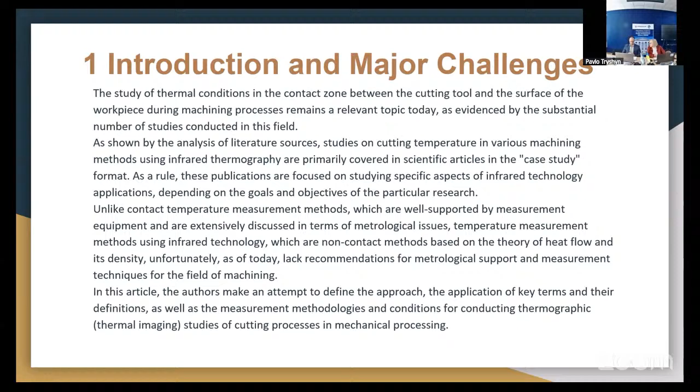In this article, the authors make an attempt to define the approach, the application of key terms and their definitions, as well as measurement methodologies and conditions for conducting thermographic studies of cutting processes in mechanical processing.

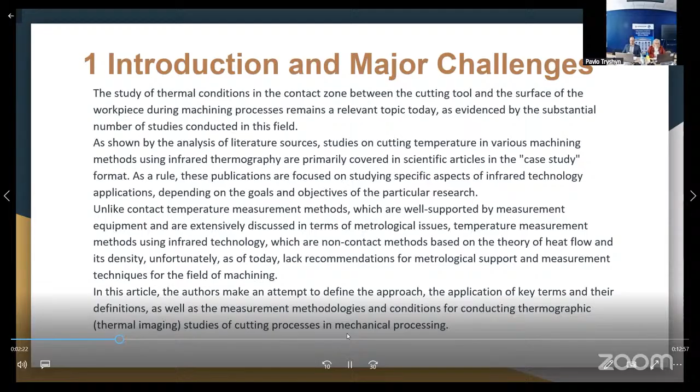Aim and research tasks. The aim of the thematic study is to investigate the specific aspects of conducting thermographic analysis of the turning processes, to define the sequential stages of the measurement method, and to establish the conditions necessary for their implementation, to ensure the acquisition of reliable experimental data.

Research tasks: define the approach, the application of key terms and their definitions, as well as the measurement methodologies and conditions for conducting thermographic studies of cutting processes in mechanical processing.

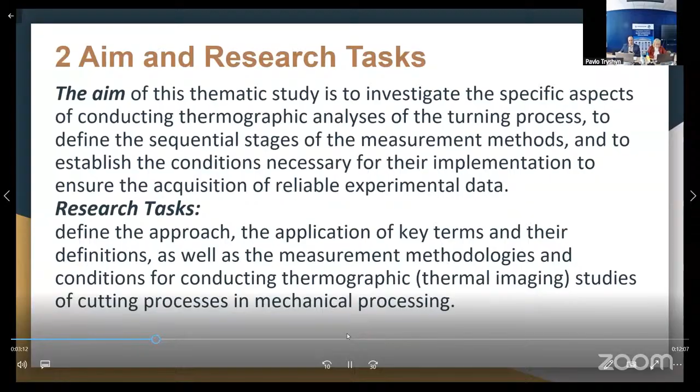Research methodology. Thermographic investigation of cutting processes in mechanical processing should be understood as a research method that displays the temperature distribution in the contact zone between the cutting tool and the workpiece being processed.

In this work, an infrared camera was used as the measuring instrument for conducting thermographic studies. It detects infrared radiation and creates a thermal image based on the radiative temperature of the surfaces of the workpiece and the cutting tool. It is known that radiation is a function of the object's surface temperature, which allows the camera to calculate and display the corresponding temperature.

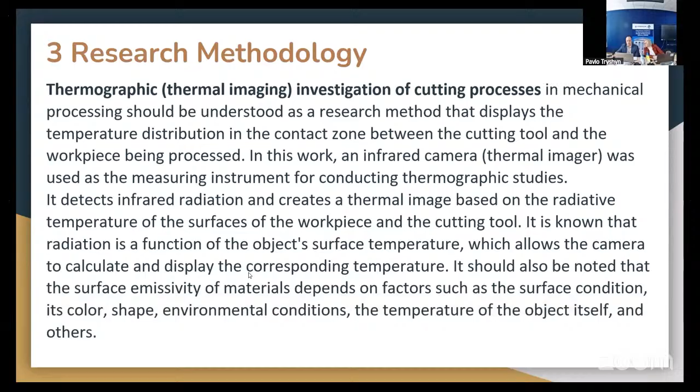It should also be noted that the surface emissivity of materials depends on factors such as the surface condition, its color, shape, environmental condition, the temperature of the object itself, and others. Therefore, for thermographic studies, it is essential to first determine the requirements for the conditions under which they will be conducted.

Metrological and technical characteristics of the thermal imager, environmental conditions, distance to the object of study and observation angle, characteristics of the workpiece and cutting materials and their emissivity, and parameters of the cutting conditions in the machining operation.

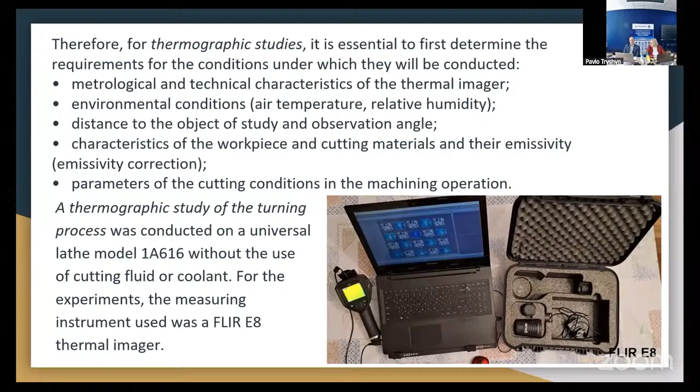A thermographic study of the turning process was conducted on a universal lathe, model 1A616, without the use of cutting fluid or coolant. For the experiments, the measuring instrument used was a FLIR E8 thermal imager.

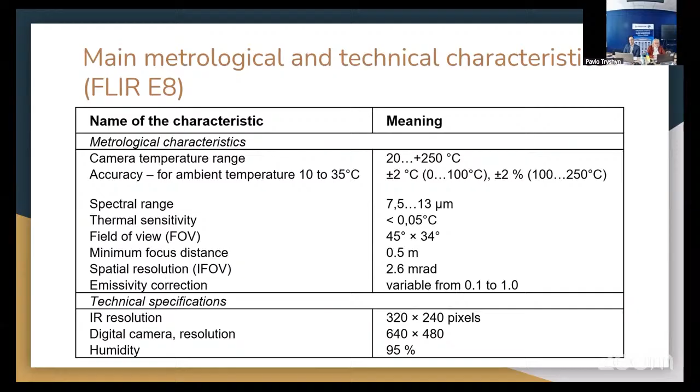This slide shows the main metrological and technical characteristics of the thermal imager FLIR E8, and a schema of the thermal imager setup relative to the measurement object. The minimum possible distance from the surfaces of the thermal control zone when using this thermal imager model is half a meter.

Considering that various materials would be processed during the experiments, resulting in different types of chips, and to avoid damaging the camera's lens, the distance to the object of study was chosen to be the minimum possible, 80 centimeters. The observation angle should be in the range of 45 to 60 degrees.

The setup scheme of the thermal imager relative to the measurement object is shown in Figure A. The infrared camera was mounted on a tripod holder, Figure B, in such a way as to cover the control zone, taking into account the necessary camera field of view parameters.

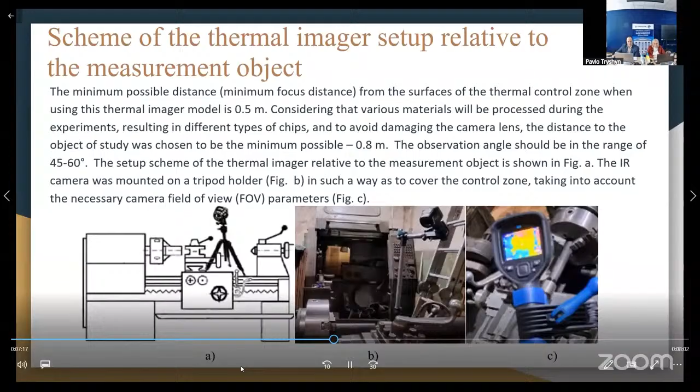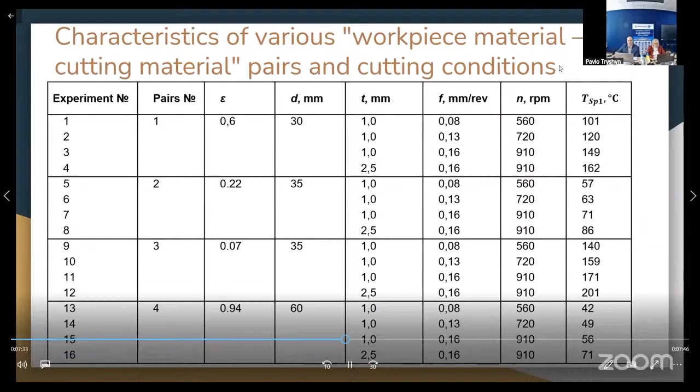Result and discussion. During the experimental research stage, it was necessary to take into account and compensate for the effects from several different radiation sources in order to obtain more accurate measurement results. This infrared camera features automatic real-time compensation, but before that predetermined values were input into its built-in software: the emissivity coefficient of the object under study, the visible reflected temperature, the distance between the object and the camera, relative humidity and ambient air temperature. This software is metrologically significant and is stored in the camera's memory device.

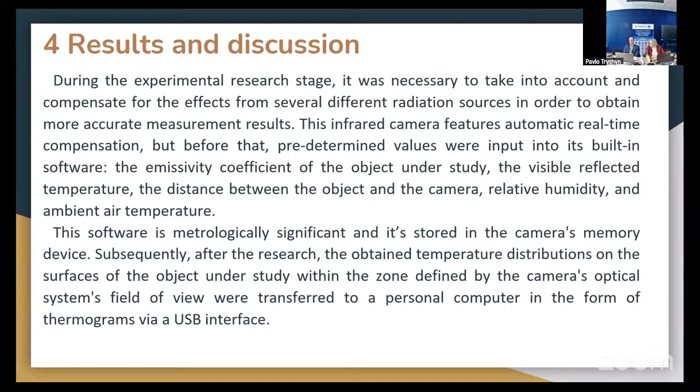Subsequently, after the research, the obtained temperature distribution on the surfaces of the object under study within the zone defined by the camera's optical system's field of view were transferred to a personal computer in the form of thermograms via a USB interface. Results of the experiments.

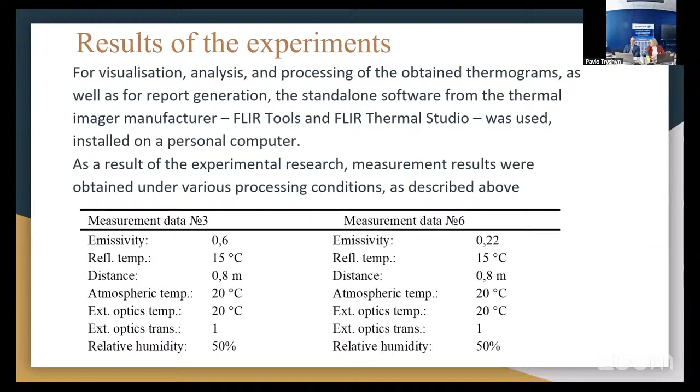Results of the experiments. The analysis of the thermograms was carried out using the FLIR Tools software by moving the spot meter to the desired area in the digital image of the object under study. It is possible to determine the temperature of the cutting insert, the workpiece, and the chips.

In the thermograms, the temperature at the contact point between the tip of the cutting insert and the workpiece is marked as spot 1. The surface temperature of the workpiece is marked as spot 2, and the temperature of the tool's rake face is marked as spot 3. The temperatures on the chip are marked as spot 4 and spot 5.

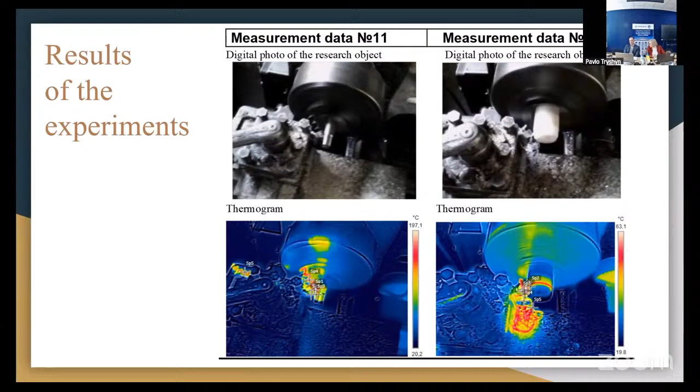Analysis of the presented thermograms. The temperature measurement results are provided in table corresponding to each experimental number listed in tables 3 and 4. To verify the accuracy of the temperatures obtained using the thermal imager in the contact zone of the cutting insert tip with the workpiece, temperature spot 1, a comparative analysis was conducted with the results obtained through the cutting temperature measurements using the natural thermocouple method, temperature T, during the machining of steels grades C22 and X12 chrome, nickel, titanium.

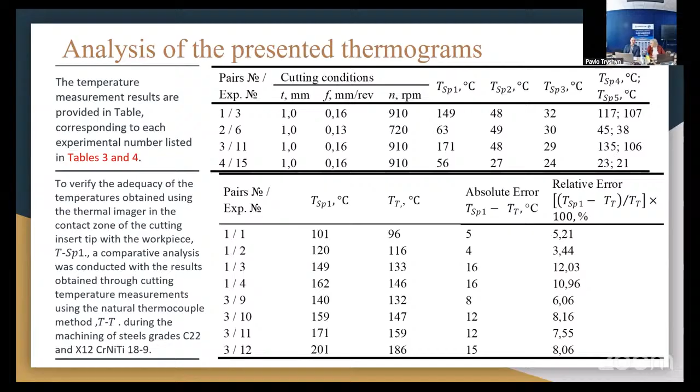Conclusions. Studies have demonstrated the utilisation of the thermographic inspection method for analyzing temperature in the cutting zone during machining processes is an effective approach. It enables research and measurements to be conducted without altering the design of the tool or the workpiece. Moreover, the method contributes to the rapid and efficient acquisition of substantial data through the analysis of thermal imaging. For example, the measurement data T-spot 1 to T-spot 5 obtained from the thermograms can be utilized to evaluate the temperature distribution across the surfaces of the tool, the workpiece, and the chip.

The cutting temperature measurement results obtained through the use of the thermal imager were compared with those derived from measurements taken using the natural thermocouple method. The obtained results of the relative error calculation fall within acceptable limits, which confirms the accuracy of the measurement data.

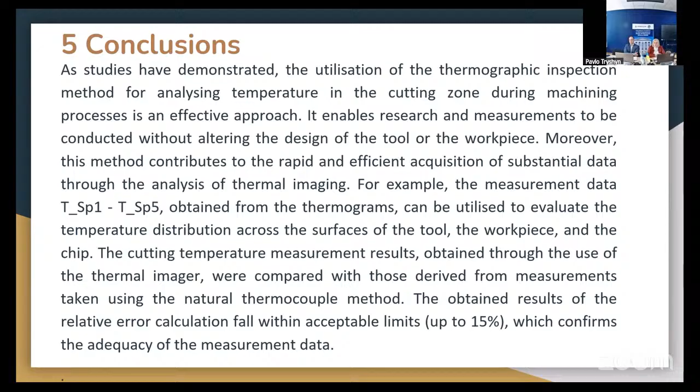For conducting a more detailed analysis of the obtained thermograms, it is advisable to utilize various functions of the toolbar in the FLIR tools software. The study emphasizes the importance of considering metrological characteristics when conducting research using infrared thermography. It should be noted that the chosen observation angle of 55 degrees plus minus 5 degrees, within the recommended range, increases the actual dimensions of the parameters of the field of view.

That means the camera effectively covered a larger area of the cutting zone, as evident from the provided thermograms. At the same time, the accuracy of the camera's focus on the object of study allowed for the clarity of the obtained images. In this regard, it is important for future researchers to correctly set the value of the observation angle when determining the field of view in order to cover the necessary and sufficient area of the cutting zone.

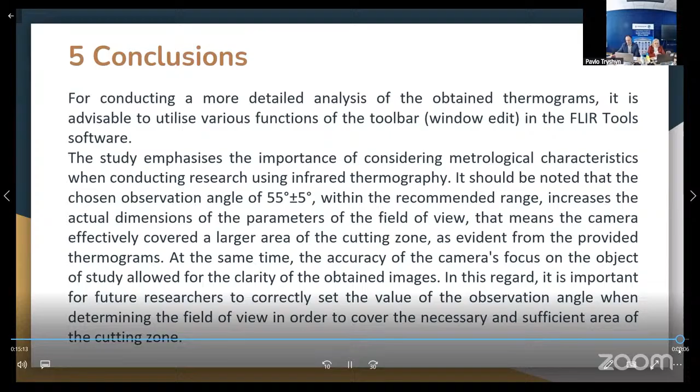Thanks for your attention.

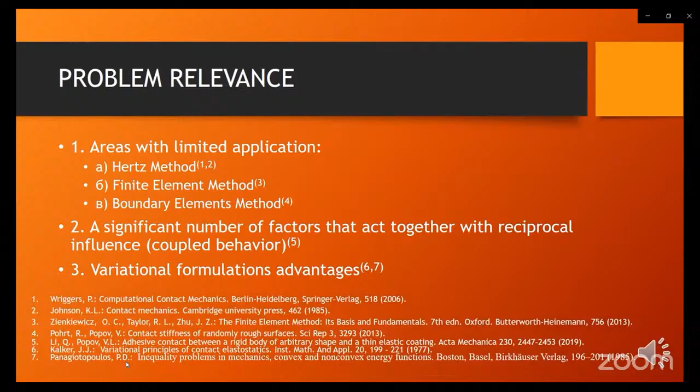This work is devoted to solving the problem using mock-up samples as an example of complex profiled body contact interaction modeling. A new approach is proposed that combines variational formulation, finite element modeling, boundary element methods, and experimental studies, providing an opportunity to substantiate the parameters of verified models. ANSYS Mechanical was used for finite element analysis during the research, but other FEA software can be used as well. For boundary element methods and variational formulation implementation, tools of our own development were used.

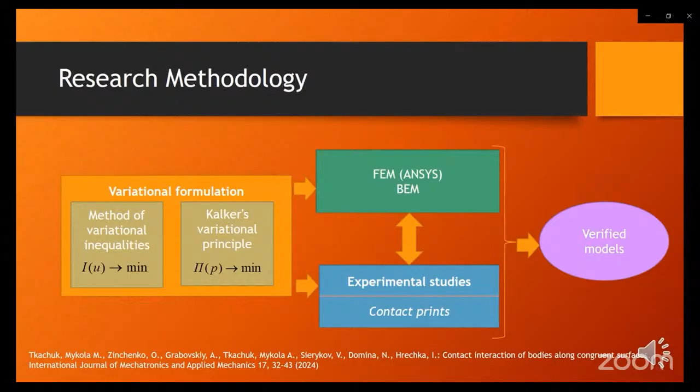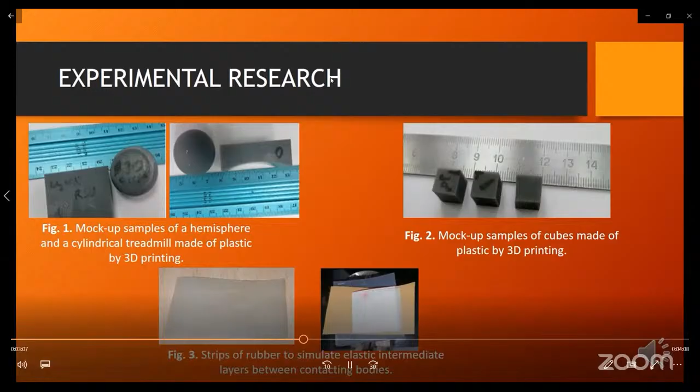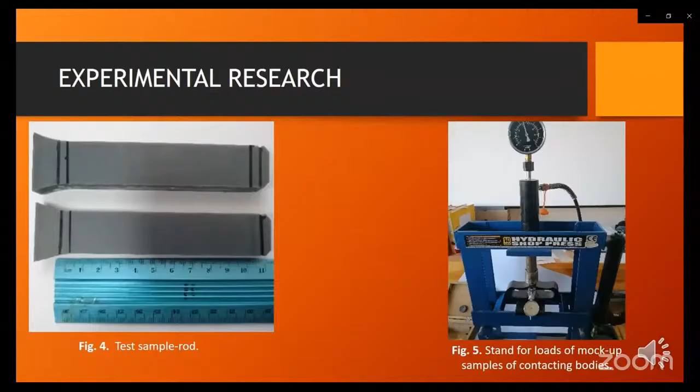For experimental studies, we used 3D printed parts as experimental samples and contact pressure sensitive films to register contact pressure distribution patterns. Parts were printed using SLA technology with 100% infill. Contact pressure was indicated using Fujifilm Prescale film. For measurement, the contacting elements are placed on a rigid steel stand and loaded with a hydraulic press. Mechanical properties of the 3D printed sample material were obtained based on cantilever beam deflections.

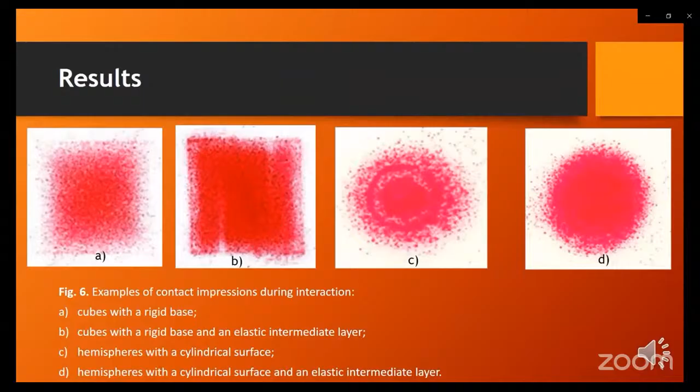These slides in Figure 6 show four different examples of contact impressions. The first two are for cubes with a rigid base. The next two are for the interaction of hemispheres with a cylindrical surface. Similar to cubes and hemispheres, the last pair had an additional intermediate elastic layer. The next two slides, Figures 7 and 8, show the geometry and finite element models built for analysis of the studied body contact interaction. In particular, Figure 7 shows an example of contact pressure distribution during the interaction of cubes with a rigid base.

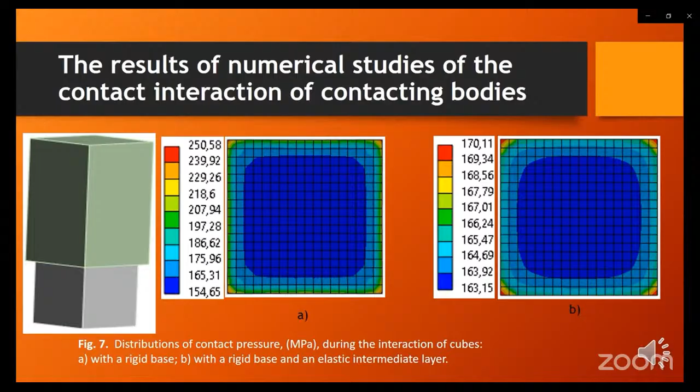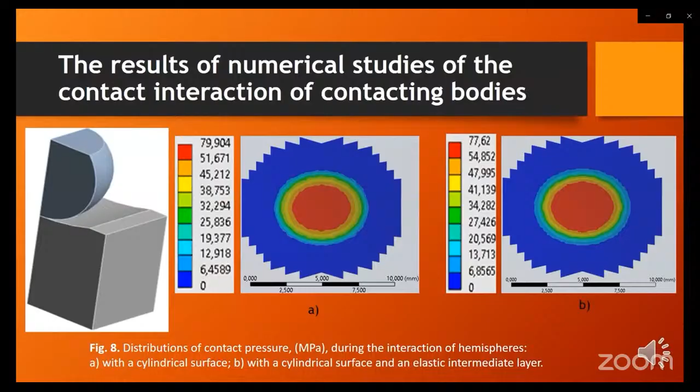On the right side with an elastic intermediate layer, and on the left without. Figure 8 shows a similar example of contact pressure distribution, but for another contact pair type. The slides show interaction of a hemisphere with a cylindrical surface, the right one with an additional intermediate elastic layer.

In this work, an experimental study of the contact interaction of bodies was carried out. Two systems were considered: in the form of a cube and a base, and a sphere and a cylinder. In parallel with the physical experiment, a number of numerical studies of the same contact interaction were carried out. The results of numerical and experimental studies were compared.

Complete and qualitative correspondence of the recorded and calculated results is established. Satisfactory quantitative correspondence of the results obtained by different methods was also confirmed. As a result, the adequacy of the developed mathematical models was confirmed.

The parameters of numerical finite element models are also determined, which make it possible to reproduce the features of the contact interaction of complex-shaped bodies in the future. In the future, the developed mathematical and software modeling support can be applied to analyze the stress-strain state of contacting complex profile elements of machine building structures.

As can be seen from the above results, the numerically determined and experimentally recorded data on the contact interaction of mock-up samples of complex profiled bodies are in full qualitative and satisfactory quantitative conformity. In particular, the dimensions of the contact area are determined with an error of 5 to 7%. The level of contact pressure error is in the range of 7 to 10%.

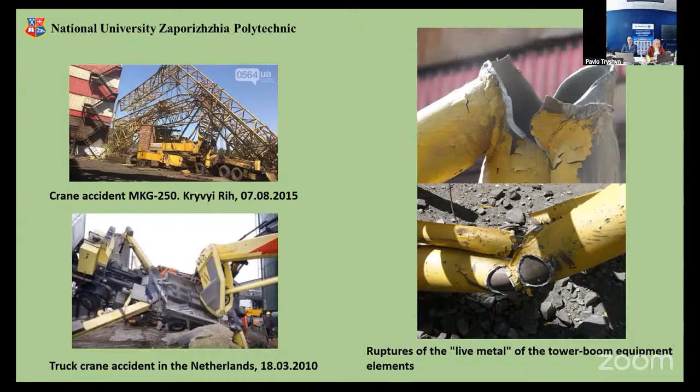That is, knowledge of characteristics and distribution laws of all random variables, which is most often absent in practice. The equipment is generally operated for its normal service life, after which inspections, tests, and repairs, if necessary, are organized. However, complete information on certain parameters of the facility is not available.

Such information is called incomplete or limited, and uncertainties of this kind are analyzed by methods of possibility theory and fuzzy set theory. On the basis of these theories, it is proposed to consider the problem of forecasting the residual resource when the probabilistic model is difficult to realize within the set problem, and the possibility model provides satisfactory results.

Current estimates characterize the degree of operational reliability of the hoisting mechanism at the time of making decisions about its state, and it is reasonable to find them directly on the fuzzy interval.

Thus, value 1 indicates a normal condition of the controlled object or parameter, and value 0 indicates its unsatisfactory condition. That is, the closer the value is to 0, the worse the condition of the control object. Consequently, the concept of the current assessment of the operational state does not contradict the concept of the value of the belonging condition of the current parameter of its fuzzy interval.

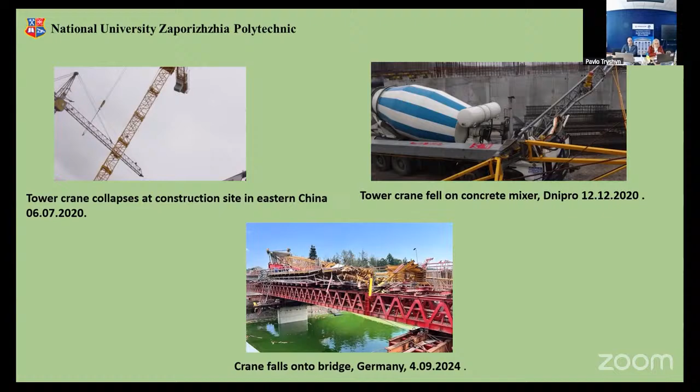A fuzzy set reveals any object to some category with some degree of belonging. From the point of view of characteristic function, fuzzy sets are a natural generalization of ordinary sets. If we abandon the binary character of this function and assume that it can take any values on the interval 0, 1, in possibility theory the characteristic function is called the belonging function, and its value is the degree of belonging of an element to a fuzzy set.

The advantage of possibility theory is the simultaneous modeling of fuzziness in the form of a fuzzy set, and quantitative description of uncertainty in the form of a pair of numbers: possibility and necessity. A distinction is made between an upper value of the probability of an event, called the possibility of a no-failure event, and the lower value of the probability of an event, called the necessity of a no-failure event.

Let us use the consistency condition of possibility theory in the form: n(t) is less than or equal to p(t), which is less than or equal to r(t), where p(t) is failure probability, n(t) is the necessity for failure-free operation, and r(t) is the possibility of failure-free operation. N(t) equals p(t), the lower value of the probability of failure-free operation, as an indicator of reliability. R(t) equals p(t), the upper value of failure-free operation.

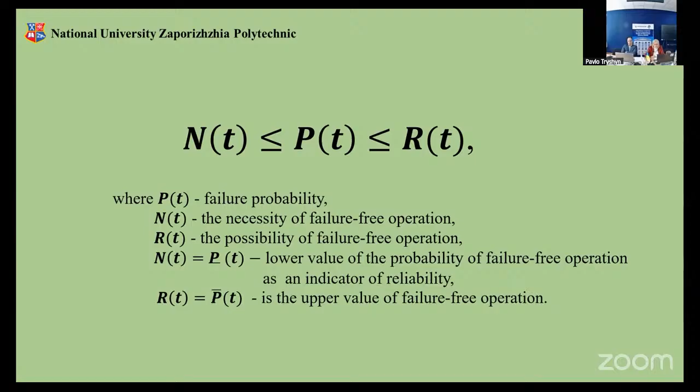A typical function is taken as a distribution function of the failure probability over time: p(t) equals exponential of negative (t minus a(t)) divided by b(t) squared, where a(t), b(t) are distribution parameters, with t less than a(t). A(t) denotes the average time to failure.

To find the parameters of the distribution, two values of expression 2 at 2 points in time, or two values of the probability of failure obtained by methods of probability theory and mathematical statistics, are required. Taking into account production conditions and limited information, it is acceptable to take the probability value as the lower value of the probability of an event obtained by methods of possibility theory.

Based on expression 2, we have A equals (T max plus T min) divided by 2. B equals (T max minus T min) divided by 2 times the square root of negative ln(alpha), where alpha belongs to 0, 1, risk levels which are set depending on the number of known values of the fuzzy variable.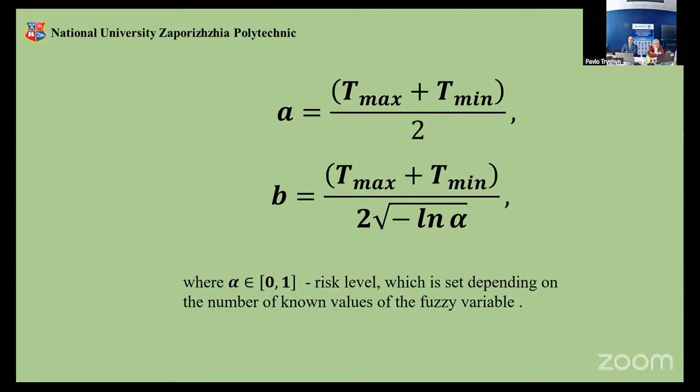Estimation of the distribution parameters is preceded by estimation of reliability, lower probability value, by methods of possibility theory at two moments. P1(t) equals 1 minus exp of negative (t1 minus at) divided by bt squared. P2(t) equals 1 minus exp of negative (t2 minus at) divided by bt squared.

From these we can find at and bt. At equals t1 minus t2 times the square root of (1 minus p1) divided by (1 minus p2), all in the numerator, and 1 minus the square root of (1 minus p1) divided by (1 minus p2) in the denominator. Bt equals at minus t1 divided by the square root of negative (1 minus p1), or equivalently bt equals at minus t2 divided by the square root of negative (1 minus p2).

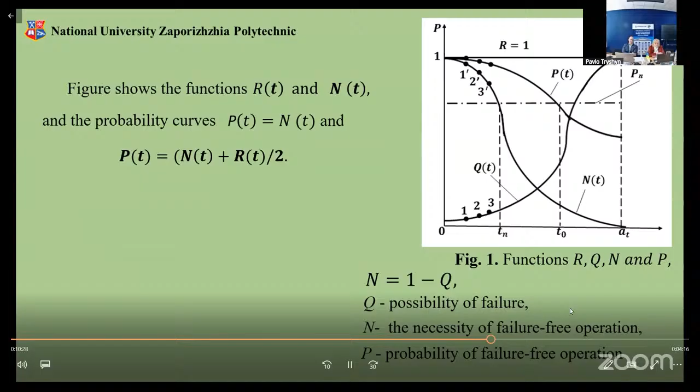Now we find the point of intersection of the curve of the necessity of failure-free operation with the level of ultimate reliability. Using the earlier expression, we need to find the parameters using two values of time.

Negative bt times the square root of negative (1 minus n1) equals t1 minus at. Negative bt times the square root of negative (1 minus n2) equals t2 minus at. After transformation we obtain: (t1 minus at) divided by (t2 minus at) equals the square root of (1 minus n1) divided by (1 minus n2), where n1 corresponds to p1 and n2 corresponds to p2.

We find at, and knowing at, we find the value of bt. From the equation, 1 minus exp of negative (t minus at) divided by bt squared equals p norm. We find the value t equals tp. The residual resource under the pessimistic option, t res p, equals tp minus t2.

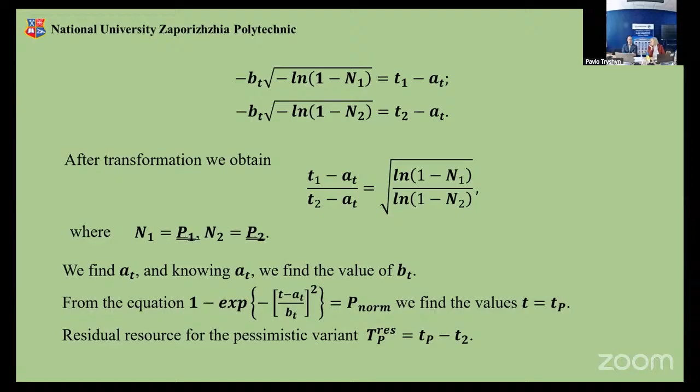Let's consider the optimistic value. To find the maximum operating time for the optimistic variant, we use the function p(t) equals 1 minus 0.5 exp of negative (t minus at) divided by bt squared. Then p1 equals 1 minus 0.5 exp of negative (t1 minus at) divided by bt squared, and p2 equals 1 minus 0.5 exp of negative (t2 minus at) divided by bt squared.

The values at and bt are found the same way. Negative bt times the square root of negative (1 minus p1) equals t1 minus at. Negative bt times the square root of negative (1 minus p2) equals t2 minus at. Since (t1 minus at) divided by (t2 minus at) equals the square root of (1 minus p1) divided by (1 minus p2).

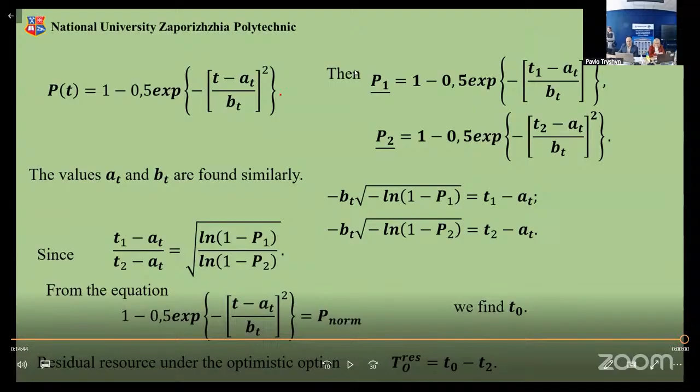Okay, I have a question. Tell me, please, what are the main advantages of the methodology you proposed?

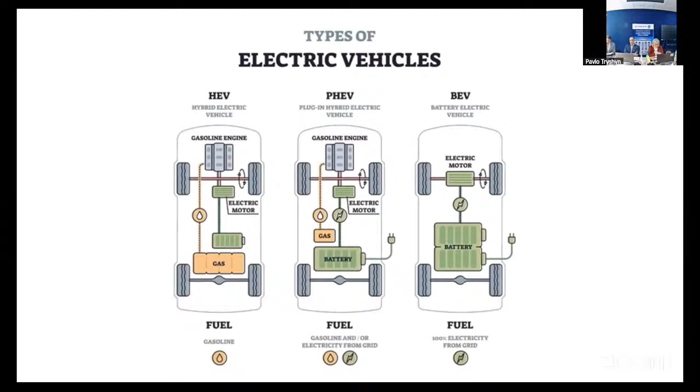This slide highlights the significance of the problem. Hybrid electric vehicles and plug-in hybrid electric vehicles significantly reduce fuel consumption and CO2 emissions. For example, Volvo CE hybrid loaders demonstrated a 50% increase in fuel efficiency. However, traditional internal combustion engines have limited efficiency between 25 and 40%, leading to significant heat losses. Optimizing energy distribution between the internal combustion engine and the electric motor can substantially improve their efficiency.

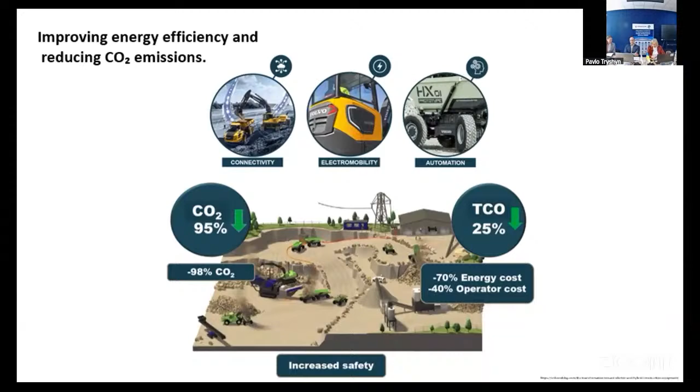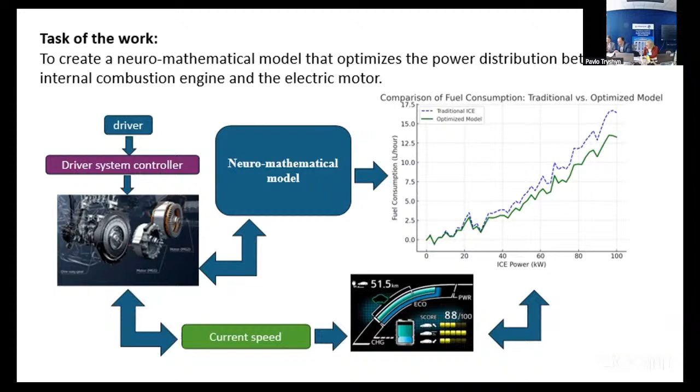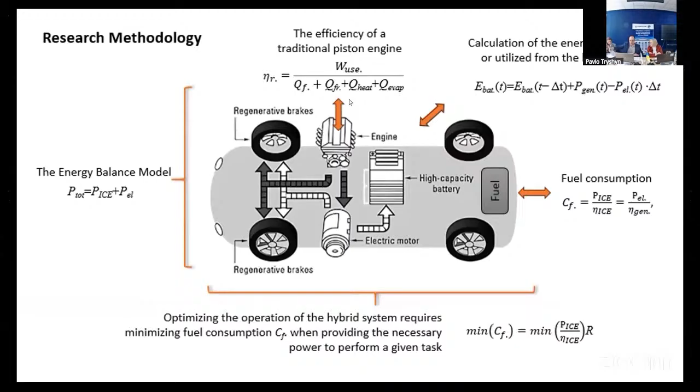This approach will enhance the efficiency of the hybrid system through intelligent energy flow management, contributing to increasing fuel efficiency and reducing harmful emissions. This slide introduces the concept of a hybrid system that combines an internal combustion engine and an electric motor, allowing them to operate in optimal modes while avoiding inefficient loads. The energy balance model is used for this purpose, where one term is the power of the internal combustion engine and the other is the power of the electric motor.

The mathematical model optimizes fuel consumption by minimizing a loss function, where one term is the actual fuel consumption and the other is the optimal fuel consumption. Real-time power distribution adaptation is achieved using a neural network trained on real system operation data. The key input parameters are temperature, load, battery charge level, and total power demand.

The research methodology focused on optimizing the operation of the hybrid system by minimizing fuel consumption while delivering the necessary power for the research task. First, the energy balance model: the total power is the sum of the internal combustion engine power and the electric motor power. Second, energy efficiency: the efficiency of a traditional piston engine is calculated by evaluating the ratio of useful work to total energy input, including fuel energy and other losses.

About battery energy calculation: the battery's energy state is determined by considering previous energy levels, energy generated, and energy consumed by the electric motor over a time interval. And finally, about fuel consumption.

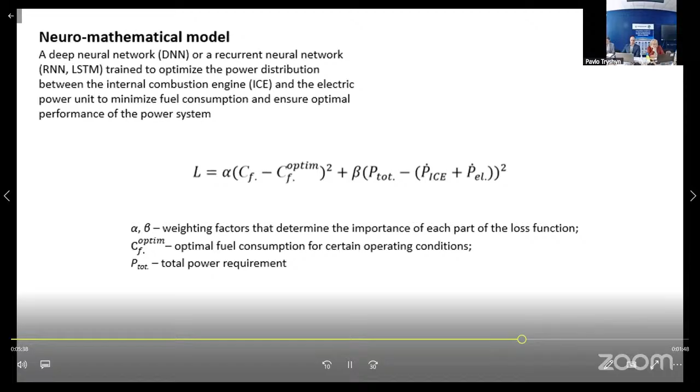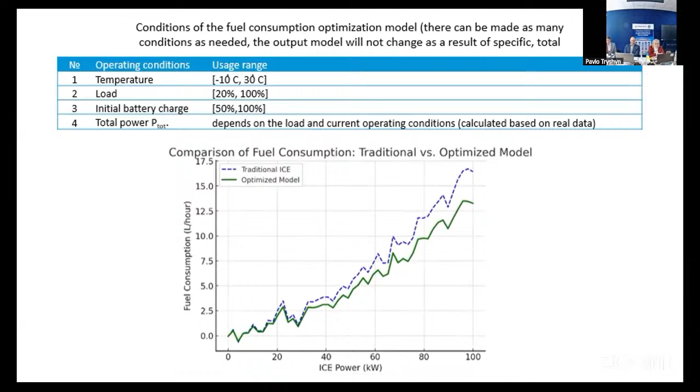The loss function graph depicts that increased ICE power above 60 and 70 kW decreases system efficiency. The optimization of hybrid system operation is achieved using artificial intelligence, which adjusts the power ratio between the ICE engine and the electric motor in real time, based on input parameters: temperature, load, and battery charge level.

As key findings, we highlight the following: first, the proposed mathematical model efficiently reduces fuel consumption and optimizes energy distribution in hybrid vehicles. Second, using artificial intelligence enables real-time power distribution adaptation based on operating conditions, opening prospects for further research and real-world implementation of this technology.

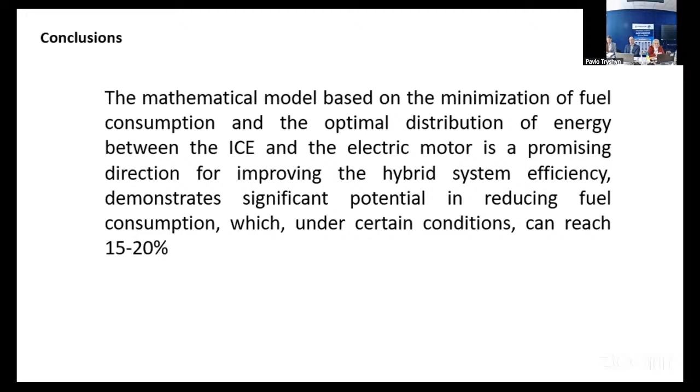Further research may focus on enhancing the neural network by employing more complex architectures such as deep neural networks or recurrent neural networks, which will improve the accuracy of predicting optimal energy distribution. My report is over. Thank you for your attention.

Thank you, Olga. Thank you, Evgeny. It was an interesting talk. Now, are there any questions from the audience?

Olena, please. Thank you, dear authors, for your interesting presentation and report. Tell me, please, have you conducted any real-world testing with a Toyota Prius vehicle to validate these theoretical results?

Good day, dear chairs, dear participants. Thank you for your question. We have mentioned that our research is only now at the theoretical stage, that's why no real tests on the Toyota Prius have been conducted yet. The 15 to 20% reduction in fuel consumption was obtained only through computer modeling. But in the future, we plan experiments to confirm these results.

Thank you. Thank you. Thank you.

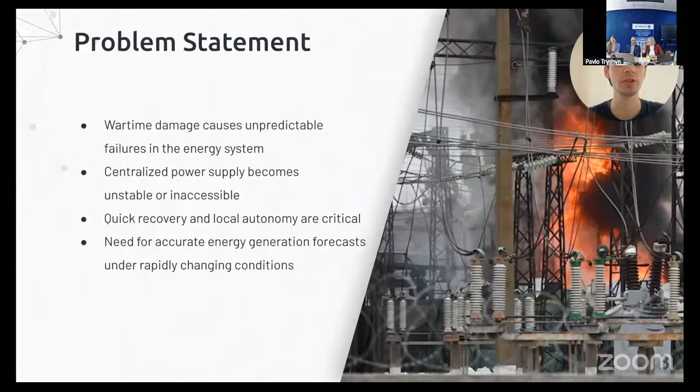During wartime, Ukraine's power grid often suffers sudden and severe damage. In such conditions, centralized energy systems become unstable and unreliable. Our goal is to restore power supply quickly by relying on decentralized energy sources. But to make them truly effective, we need precise real-time forecasts, because energy demand and weather conditions can change rapidly. That's the core challenge this paper addresses: how to forecast local power generation accurately and autonomously, even during emergencies.

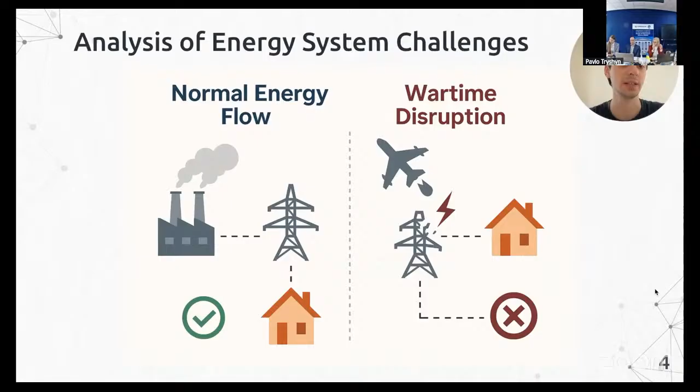Traditional energy systems were never designed for war conditions. They rely on central infrastructure—large power plants, transmission lines, transformers—all of which can be damaged without warning, either by natural events or enemy attacks. Once damaged, repairs take time. This means cities, villages, or even critical infrastructure might be left without power for hours or even days. To adapt, we need a system that can function even when isolated, and that starts with understanding these vulnerabilities.

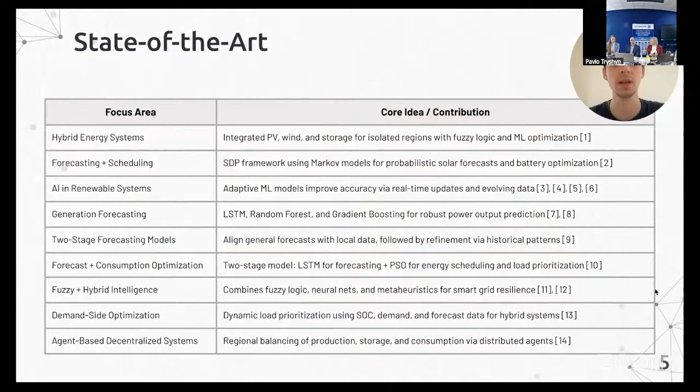Let's take a brief look at the existing research on this field. The literature confirms that machine learning and hybrid approaches play a crucial role in the stability and efficiency of modern renewable systems. Our research builds on these foundations by comparing several machine learning strategies under clustered, group, and tree-based experimental setups, aiming to find the best match for real-world island mode systems.

To solve the problem, we propose a decentralized forecasting architecture. Each energy node, whether a home, shelter, or medical post, has its own mini-forecast unit. It collects real-time data from local sensors and predicts power generation for the next hours. This makes the system independent from a central controller, allowing fast, autonomous recovery even if part of the grid is destroyed. The key innovation is embedding intelligence right at the edge, at the local energy source.

For reliable forecasting, we need accurate, up-to-date information, and online weather APIs are simply not precise enough in local wartime conditions. That's why we deploy real-time sensors for wind, solar, and battery metrics directly at the site. These sensors connect to a microcontroller that processes and stores the data locally. This setup allows us to react quickly to challenges in the environment and forecast power generation more precisely, even when disconnected from the internet.

Our forecasting strategy is based on 3 groups of experiments, each designed to analyze different learning methods and data structures. First, we applied cluster regression approximation using k-means to partition data and then training separate models: linear regression, MLP, and long short-term memory for each cluster.

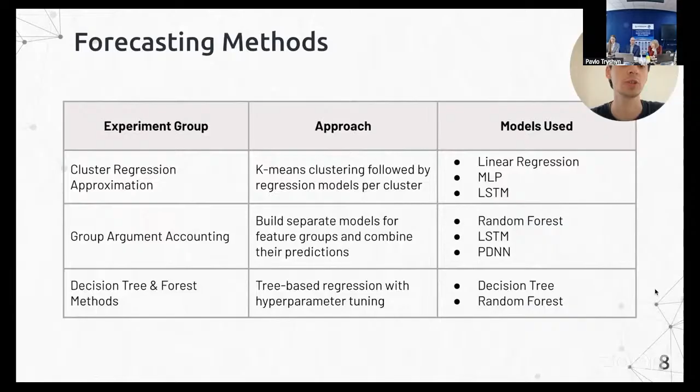And structures. Our experiments used data from 2 solar power plants in India, recorded over 34 days. We used a rich feature set, including not just raw sensor values like radiation and temperature, but also temporal features, interaction terms, and rolling metrics. After cleaning and normalization, we trained and tested our models on over 115,000 data rows, ensuring that the setup closely reflects real-world, time-dependent solar generation scenarios.

To evaluate the forecasting accuracy, we used different metrics. In the cluster regression experiments, long short-term memory achieved the best accuracy for two clusters, especially for tasks involving sequential data. MLP provided a good trade-off between accuracy and computational cost at 4 clusters.

In the group argument accounting methods, the polynomial deep neural network model stood out with the highest overall accuracy. The determination coefficient of 0.61 and root mean square error of 216.44, highlighting its strength in modeling complex feature interactions.

Finally, in the tree-based experiments, random forest outperformed decision trees with a determination coefficient of 0.5 and the lowest mean absolute error of 122.51, showing good robustness. These results confirm that the best model depends on both the data structure and the forecasting goal.

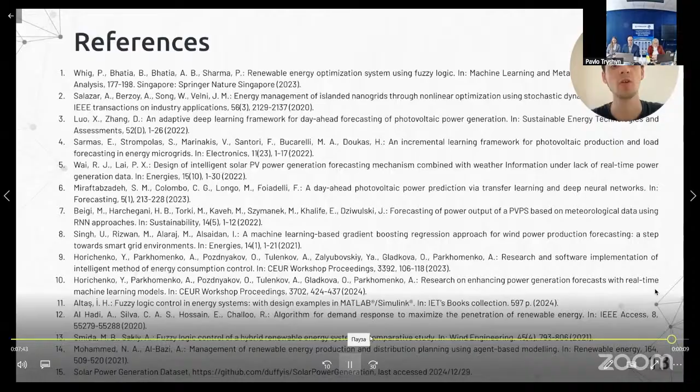These are the core references we relied on to develop and validate our research. And that's all for now. Thank you for your attention.

Thank you. It was an interesting and informative talk. Now, are there any questions from the audience?

Okay, Alina, please. So yeah, if there is no question, let me ask. Have you considered cases of erroneous forecasting by the proposed method? And if yes, what measures should be taken in such a case? And one more additional question: can there be different types of errors and different consequences for the power system? So, questions in one, sorry.

Angelica, so who will answer? Just a moment. Okay, it seems to me Yuli is here.

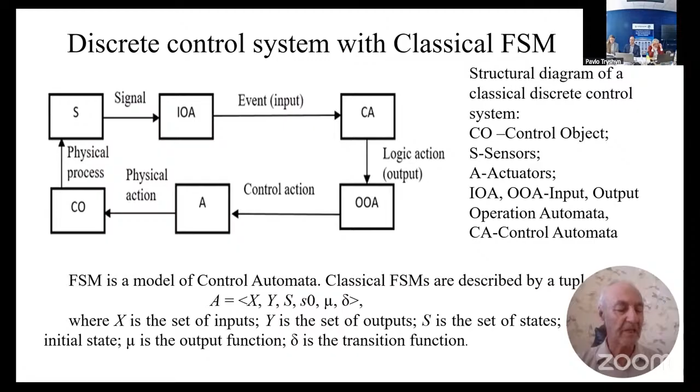In slide 2, FSM is a model of control automata. Classical FSMs are described by a tuple, where X is the set of inputs, Y is the set of outputs, S is the set of states, S0 is the initial state, mu is the output function, and delta is the transition function. The automata are widely used in the practice of designing control systems.

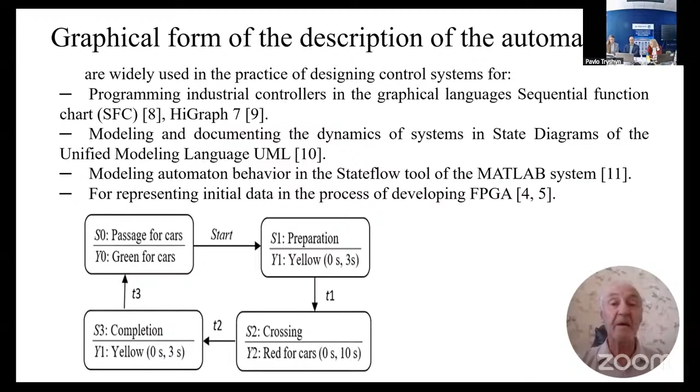The slide shows a description of a traffic light machine as an example. Let us note a number of properties of real control systems, the formalization of which within the framework of the tuple is impossible or leads to a significant increase in the dimension of the control automata.

These properties are shown on the slide. The purpose of the work is reducing the dimension of control automata by expanding their functionality. The objective of the work is to modernize the system control structure and display new functionality in the FSM tuple.

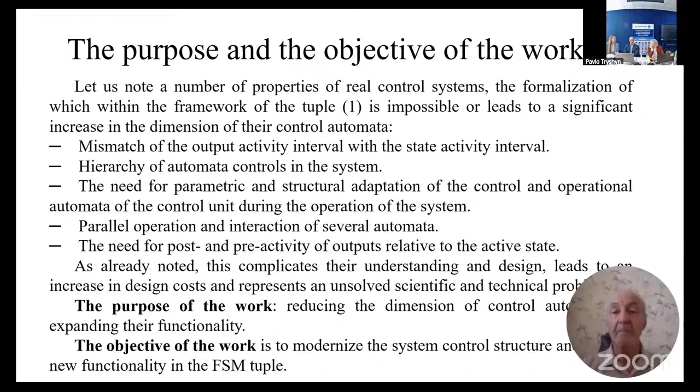The main properties of the elements of the tuple of a classical control machine are as follows. Property 1: the elements of sets of the automata are elements of the binary data type. Property 2: the time interval of output activity coincides with the interval of state activity. Property 3: the functions of the outputs mu and transition delta of the machine are defined in the tuple of the machine and do not change during its operation. Property 4: at each moment of the machine's operation, one and only one state is active.

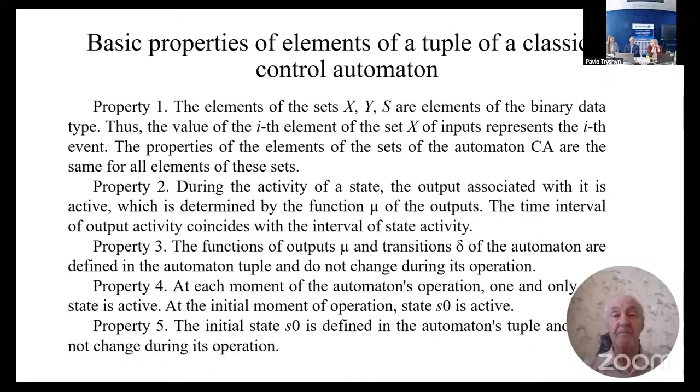The main properties of the operation of machines of the control unit of the system are as follows. Property 6: in the control unit, the input x sub i of the CA machine is considered as an event. Event processing consists of a change of active state, and the expression of the truth which determines the event does not change during the operation of the machine.

Property 7: the control action has no gradation. The logic of converting the output into a control action does not change during the operation. Property 8: at any given time, only one event can be active, and there may be no active events.

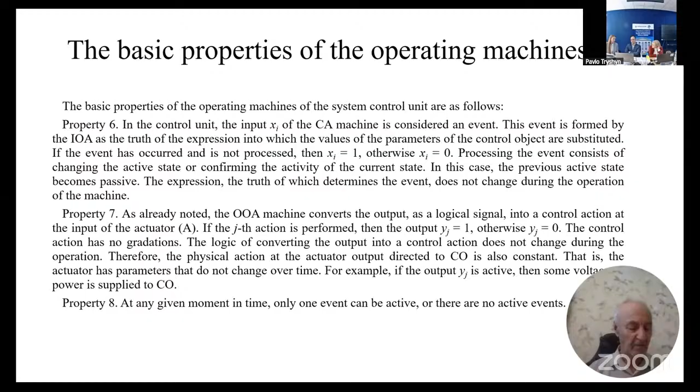Methods for extending the properties of control machines are as follows. Method 1, non-binary: the elements of the set of the machine become non-binary, that is, they have more than two values, for example passive, preparatory, active. You can specify a spot activity and bind the output parameters to the activity level of the state. For example, the output in the active and preparatory states can differ.

Method 2, qualifiers. The step qualifier describes the time interval of the output activity relative to the state activity interval. For example, the start offset, duration, and the end condition of the output activity.

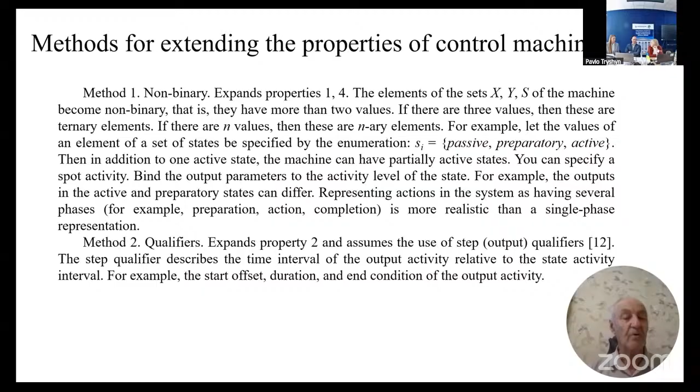Method 3, nesting. The method consists of interpreting the output of the A1 machine as an action to call the A2 machine embedded in the state. In this case, the embedded machine is subordinated to the original machine, and a hierarchy of subordination arises, which can have several levels.

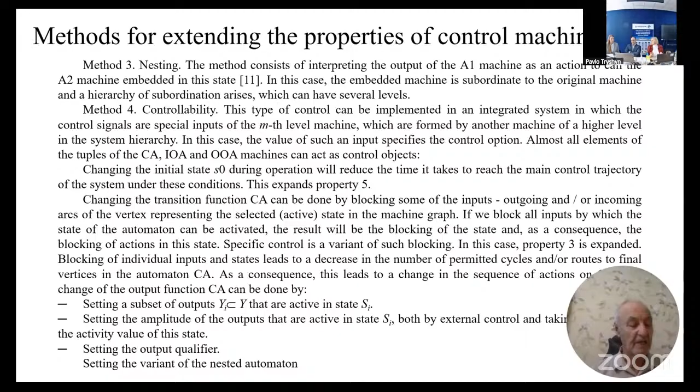Method 4, controllability. This type of control can be implemented in an integrated system. Almost all elements of tuples of control automata, input operation automata, and output operation automata machine can act as control objects.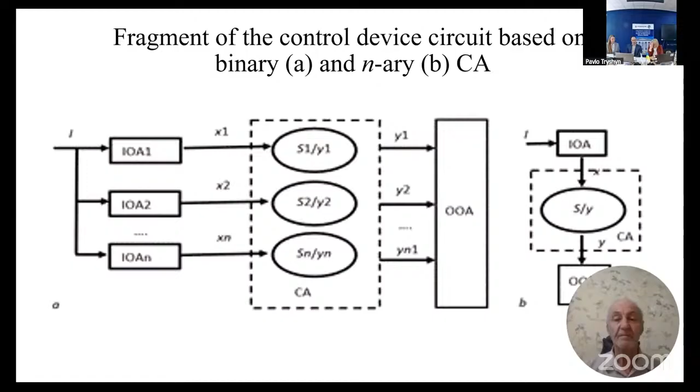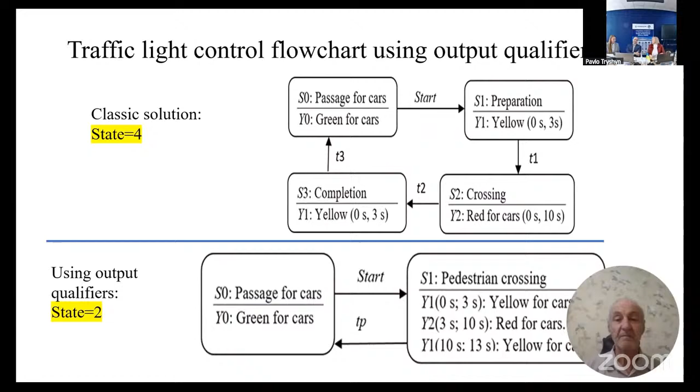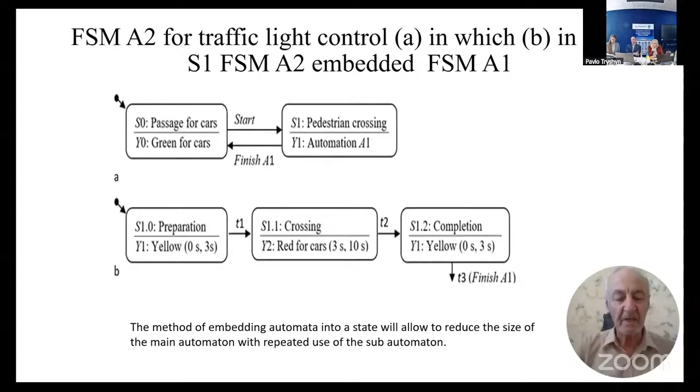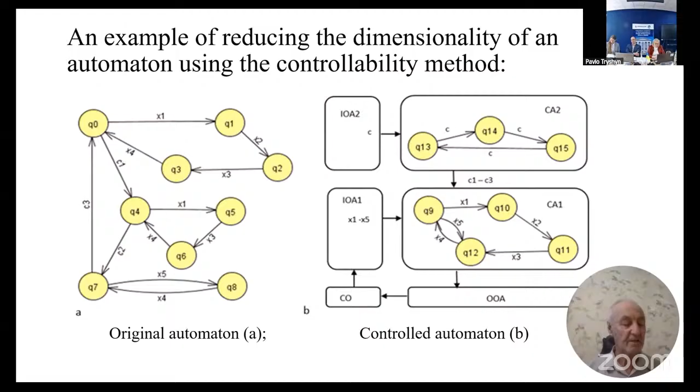Conclusions. It is shown that the graphical representation of the functionality of systems using the classical FSM has a large dimension. This complicates understanding and complicates the design of systems.

The known methods of expanding the basic properties of classical FSM tuple elements and reducing the dimensionality of the description of control devices on this basis were systemized, and new methods were described. These methods use the non-binary nature of FSM set elements, FSM output qualifiers, FSM nesting in states, and control of the structure and parameters of control device elements of the given and lower levels of the control system.

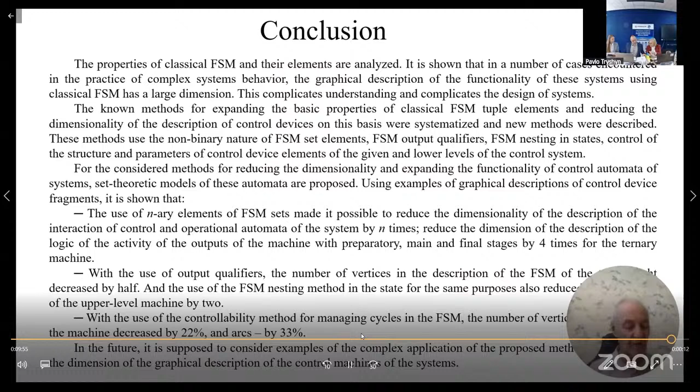For the considered methods of reducing the dimensionality and expanding the functionality of control automata of the system, set theoretical models of these automata are proposed. The effectiveness of the proposed methods is shown by examples of graphical description of fragments of the control units. Thank you for your attention.

Thank you, Mikhailo. Are there any questions from the audience? Alina, please, your question. The first question is, what are the evaluation criteria for the effectiveness of the proposed methods compared to classical FSMs?

I will divide the question into two. First, what are the criteria of evaluation of effectiveness? And second, how much more effective are the proposed methods? Answer for the first question: the criteria of effectiveness is the number of vertices and/or arcs in the graph of the automaton. The method is considered effective if the number of vertices or arcs in the graphical model is reduced.

And the answer for the second question: in the examples given, the number of vertices is reduced by 2 times if you use binary FSM, and by n times if you use non-binary FSM.